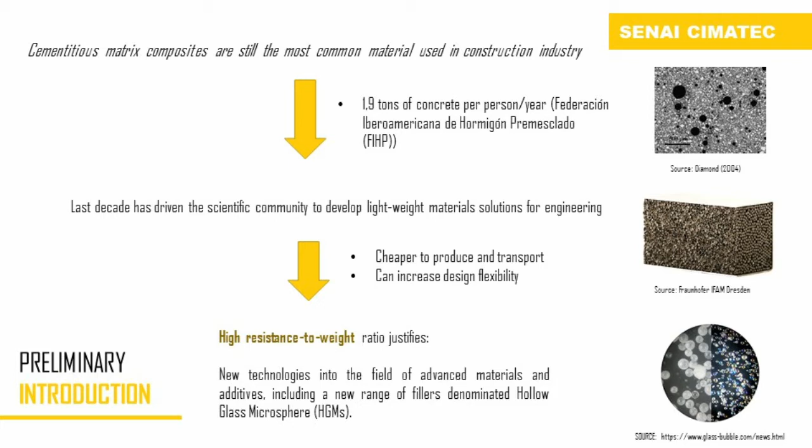Over the past few decades, the scientific community has directed efforts to develop lightweight materials and engineer solutions. Two big reasons are they are cheaper to produce and transport, and the design flexibility is increased. Another important challenge is to have a balance of resistance and weight. Therefore, a range of new technologies has become more important, especially advanced materials and additives, including a new material denominated hollow glass microspheres or HGM.

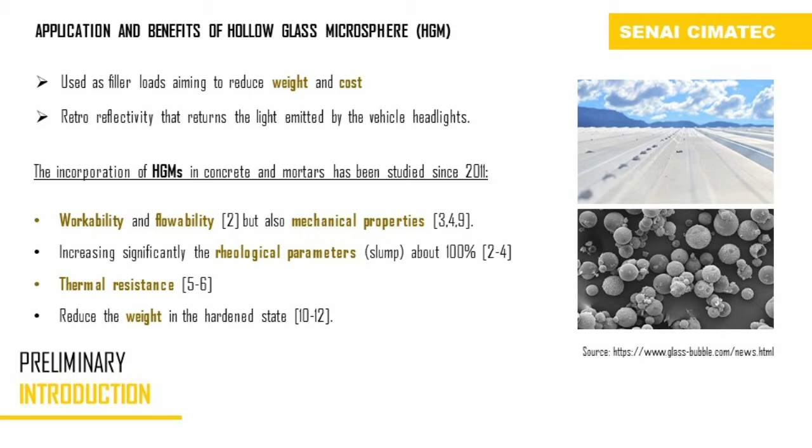So now you can see the application and benefits of HGM. The two general applications are filling material, reducing weight and costs, and reflective effect of the lights emitted by vehicles on roads and highways. Going deeper into the use of microspheres in concrete and mortars, we can find multiple benefits and suggestions. These benefits are workability, flowability, mechanical properties, rheological parameters, thermal resistance, and reduced weight in the hardened state.

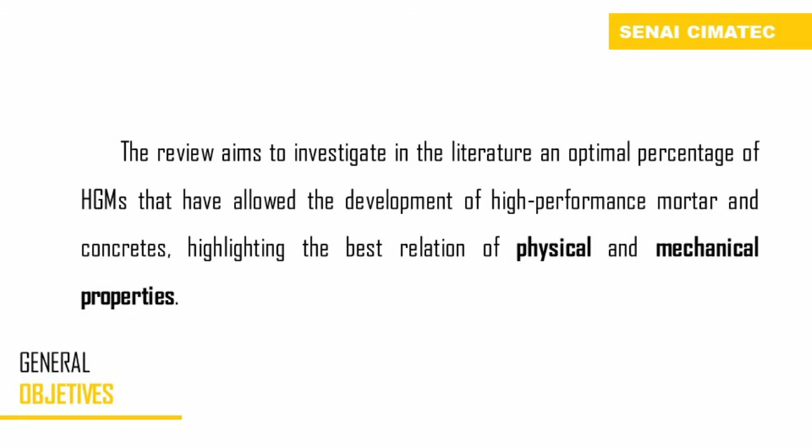The review aims to investigate in the literature an optimal percentage of HGMs that have allowed the development of high-performance mortar and concrete, highlighting the best relation of physical and mechanical properties. The material and method of this work has focused on selecting the relevant databases in Scopus, Science Direct, and Brazil and Portugal repositories about use of HGMs in work and research with help of specific keywords to find work related to that theme. The keywords are HGM, mortar, concrete, and cementitious matrix. A total of 9 relevant articles are selected and 4 dissertations.

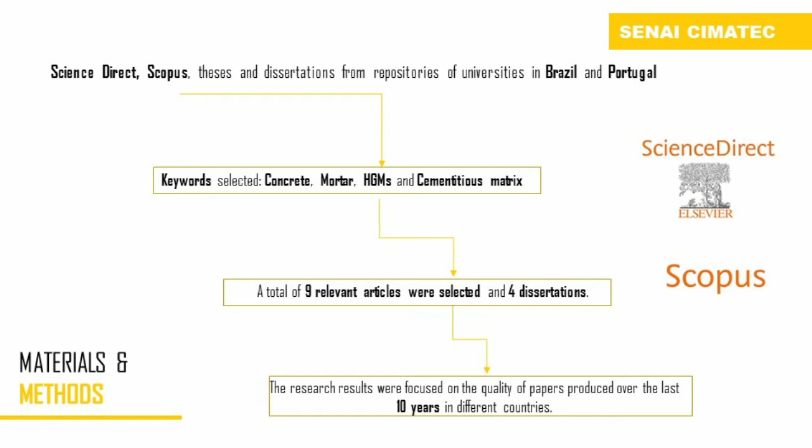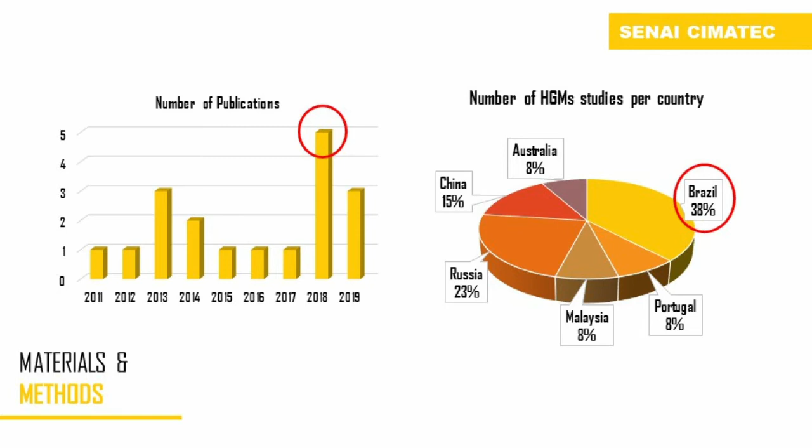Here you can see the two graphics. The first graphic on the left shows the numbers of publications in the last decade. We can see clearly the number of publications has increased in the last 3 years. The graphic on the right shows the pie chart. We can see that Brazil has the highest percentage of publications about the theme.

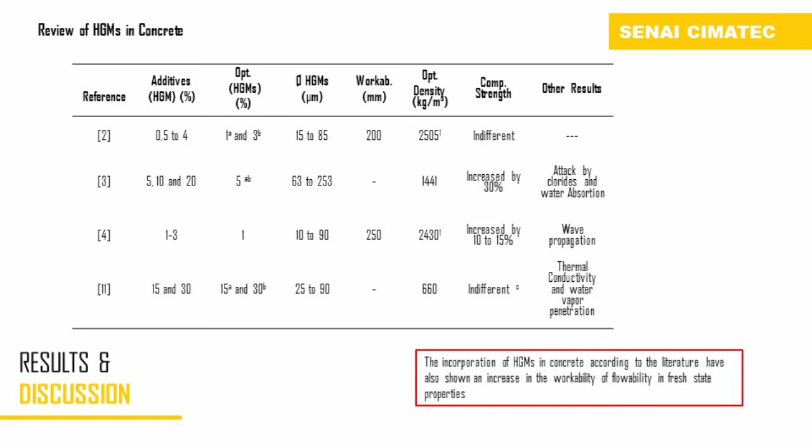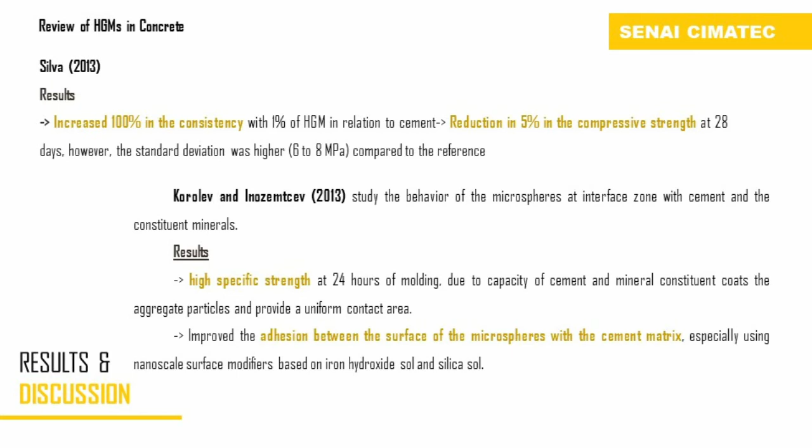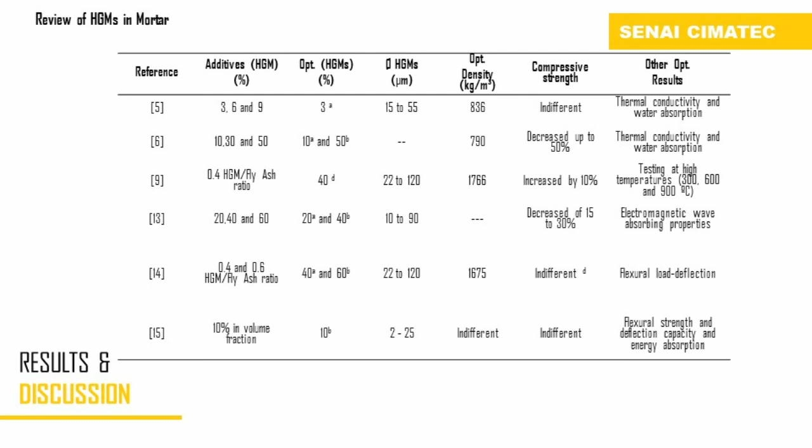Shahidan et al. obtained a reduction of up to 20% of the density and gain of thermal resistance and increase of compressive strength with 3% of HGM incorporation. The optimal percentage to gain a lower density is 9% of HGM in this result. Perfilov has studied the incorporation of 10, 30, and 50% of hollow glass microsphere for mortars. They have noted that flexural and compressive strength are higher at high temperatures, with low density and good thermal conductivity.

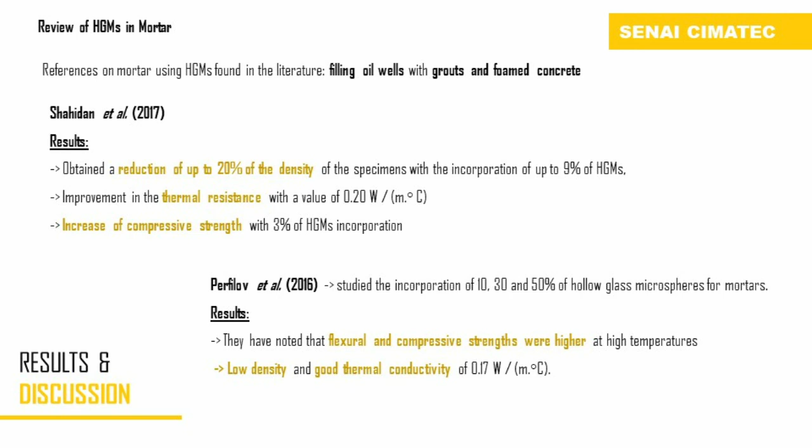The use of HGM in mortars provided good results in the acoustic resistance of the composites. This effect is due to the presence of the empty interstices promoted by the microsphere between the minerals in the hardened state. On the other hand, these voids influenced the water absorption of the mortar.

Now, after our results are shown, it can be concluded an optimal percentage of HGM in concrete and mortar is essential to obtain a better strength-to-weight relation. Due to spherical geometry, the surface area of HGM is shown to be beneficial in concrete and mortar's fresh state. In the hardened state, HGM can improve the contact area, increasing the microstructure interfacial adhesion. HGM can be used as a filler to improve thermal and acoustic resistance.

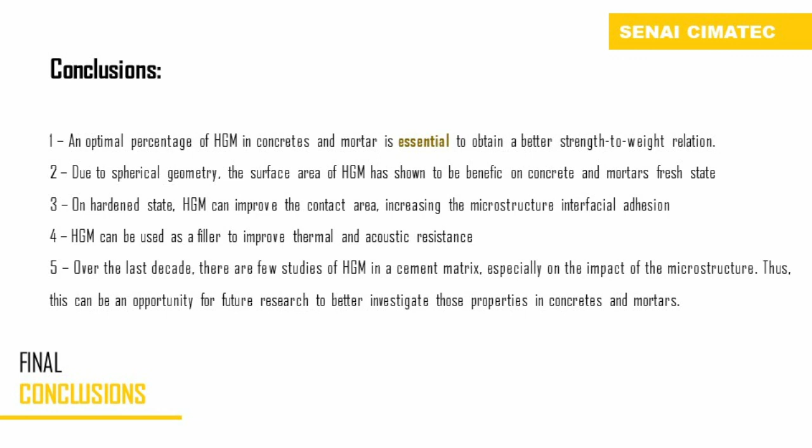Over the last decade, there are few studies of HGM in a cement matrix, especially on the impact on the microstructure. This can be an opportunity for future research to better investigate these properties in concrete and mortars.